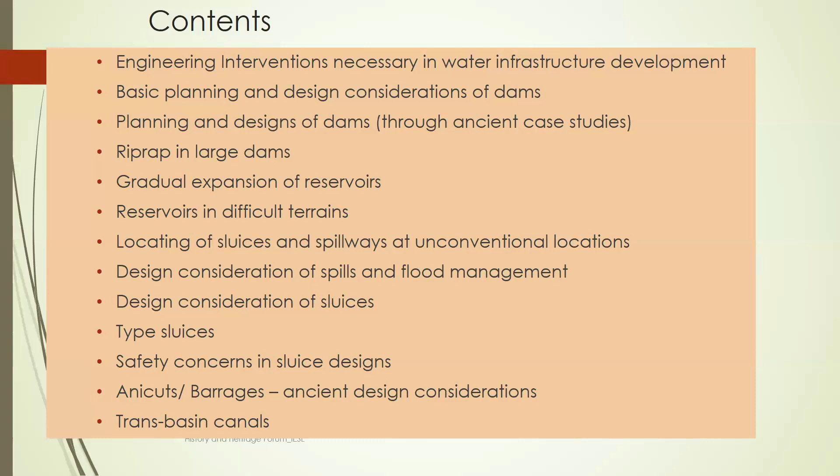So you can see minimum, at least a minimum of 10 years will be needed for commissioning of a new scheme at the ground, and it will go beyond that depending on the above facts I just noted. At the same time, it is not a one-man show as we often hear in folk tales, that this man built up this reservoir and things like that. Actually, the success of both ancient and modern projects depends on the experience and dedication of a multidisciplinary team, that we should keep in mind that it is teamwork actually.

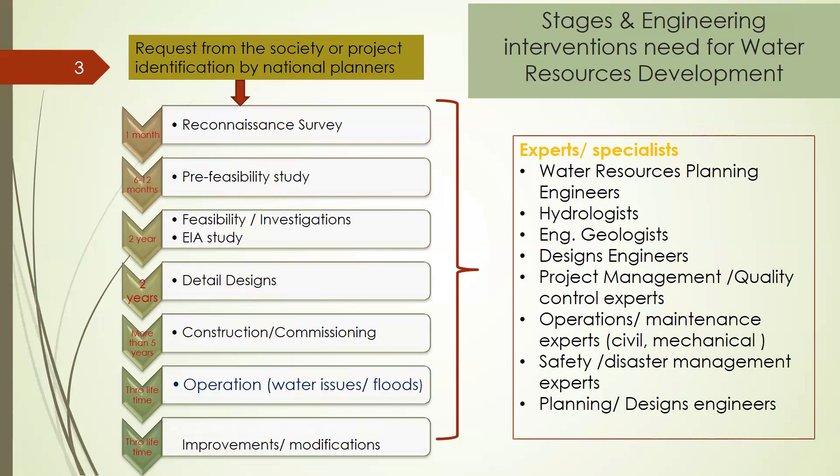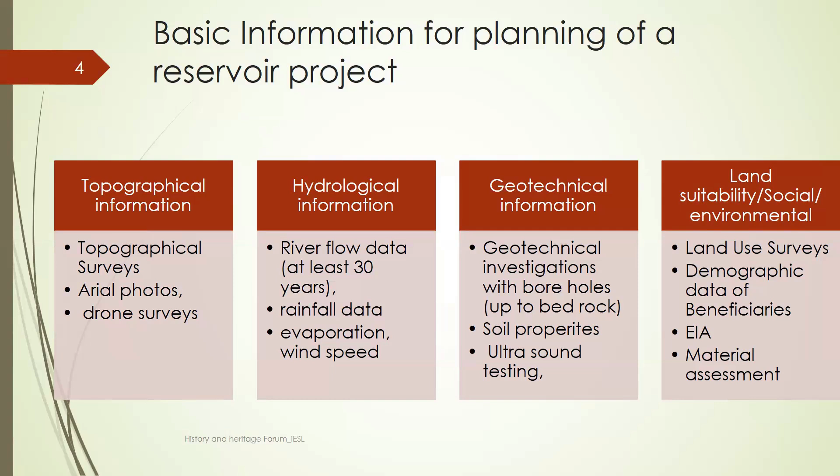Since I discuss more matters on reservoirs, I thought of introducing basic features of a reservoir project for the benefit of the audience here who are not familiar with the principal features of a reservoir project.

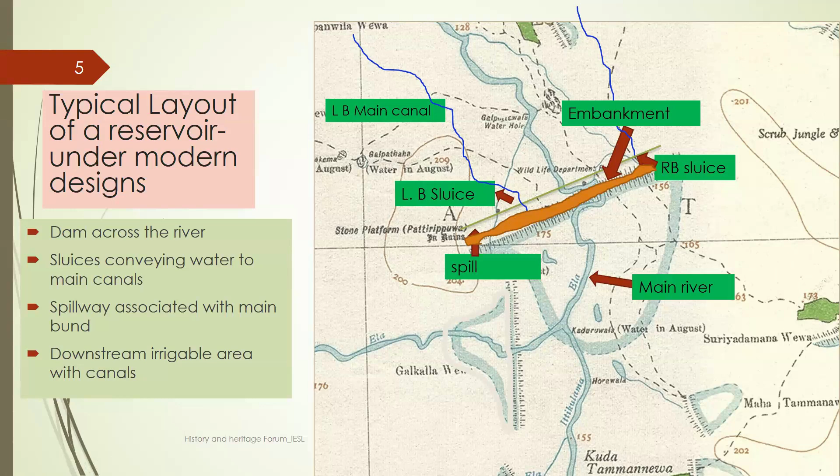While this seems a very simple arrangement, ancient engineers optimized these features based on site-specific needs, deviating wherever necessary depending on specific site conditions. I will go through some components of this list for you to get a general idea about planning and design principles in the foregone era and also in the contemporary era.

The basic consideration the design engineer will focus on for a dam: first and foremost, the dam should be stable - that is obvious. Then it should be able to control excessive seepage, with only an allowable limit through the dam, especially the earth dam.

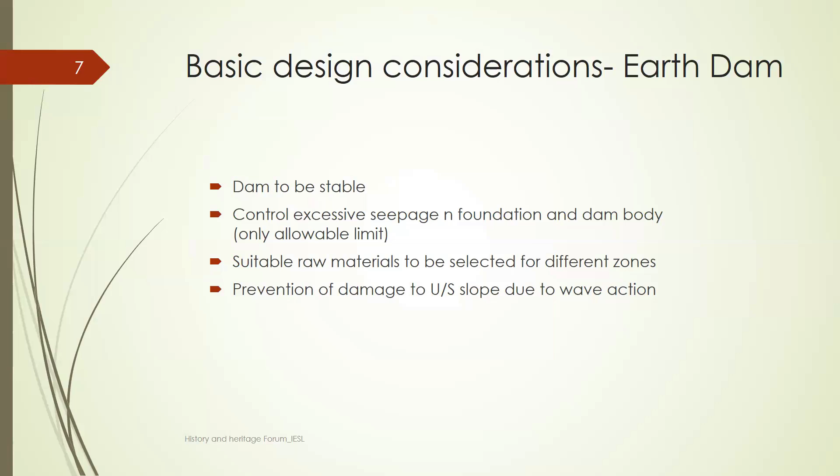For that, suitable materials are to be used and construction done with extra care, having very strict quality control. The most frequent damage to an earth dam occurs covering the slope, that needs to be prevented in the upstream due to wave action, where riprap is used. So those are the very basic things I must mention here.

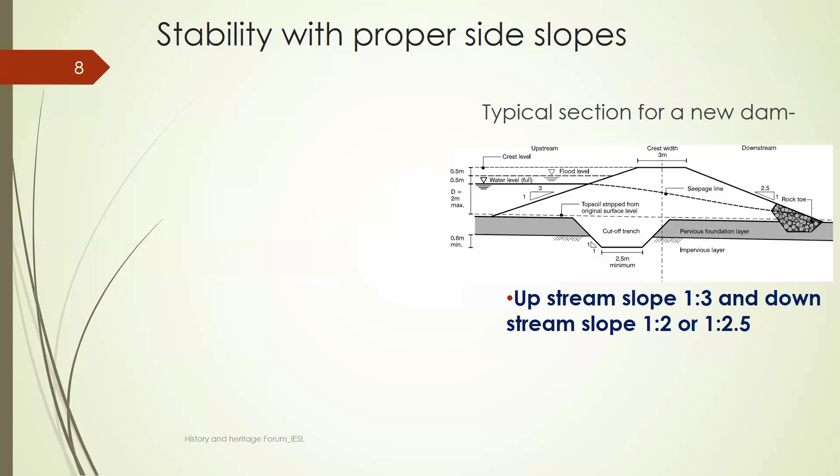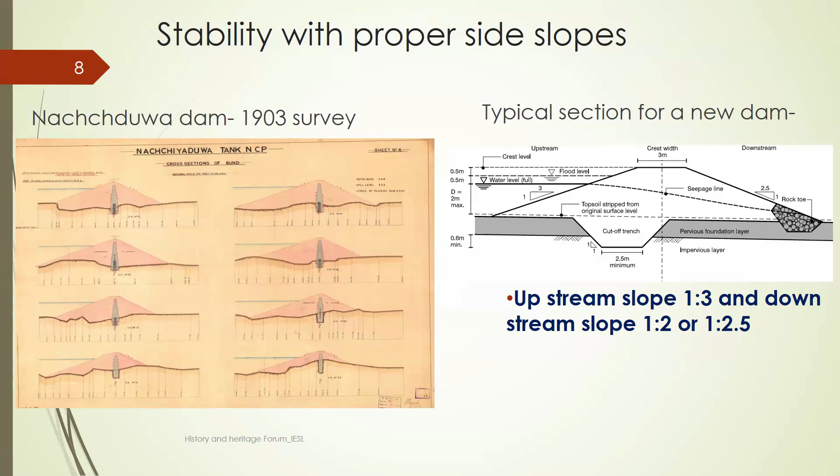But today, engineers optimize designs mainly considering the overall costs and also to save raw materials.

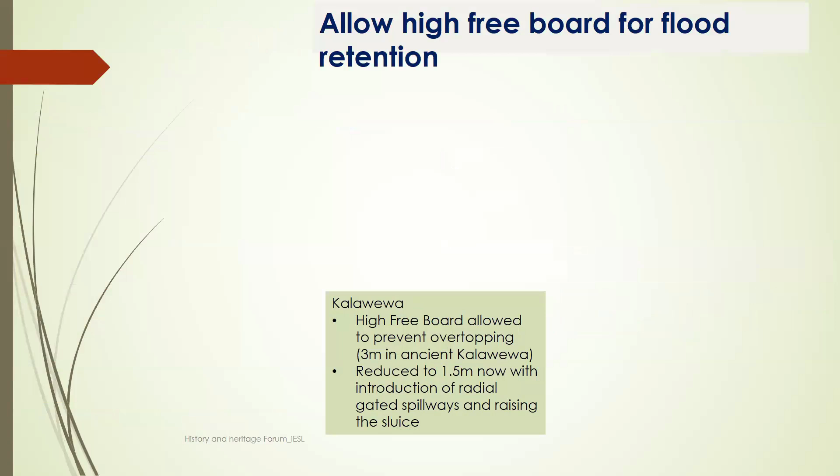One other safety factor in the ancient earth dam is the high freeboard - that means the height difference between the spill crest and the dam top. This space is allowed to retain flood water during storms, as mechanical gates were not available in the ancient era. Flood control was possible only through natural spills.

The sketch shows the Kalawewa bund based on surveys done on restoring during the 1870s, and the photograph also is the Kalava sluice that was not raised according to the new design.

This volume of water between the dam crest and the full supply level, spill level, what I have marked here, can be called inactive volume, because it is a flood detention volume, and it will go away when the flood recedes after the storms.

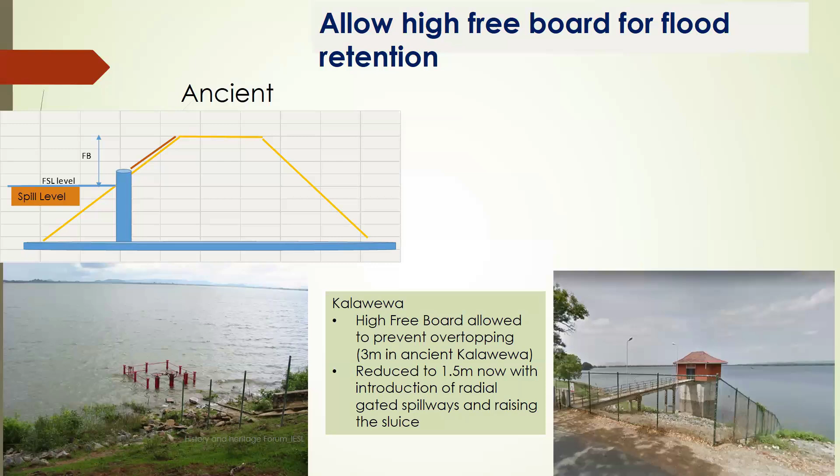So as the freeboard was - I will go into the current section as well here to show you the difference. Actually, in the ancient Kalawewa dam, the freeboard was 3 meters minimum, in some places more than that. Then with the new hydrological analysis, this could be reduced to 1.5.

Now with the introduction of radial gates, and also by extending the spillway length, we could reduce the freeboard, and also increase the active storage, and also increase the height of the sluice. So you can see this new sluice in Kalawewa is at the same level of the bund crest level, and you can see the volume of active storage that can be used for various benefits could be increased that way.

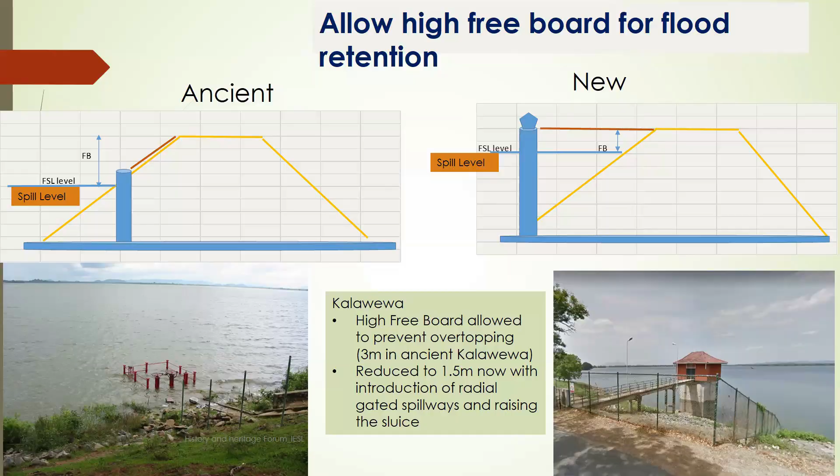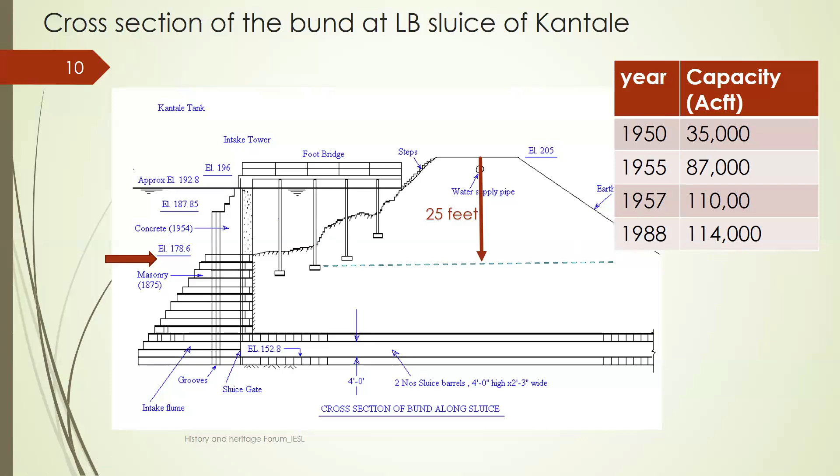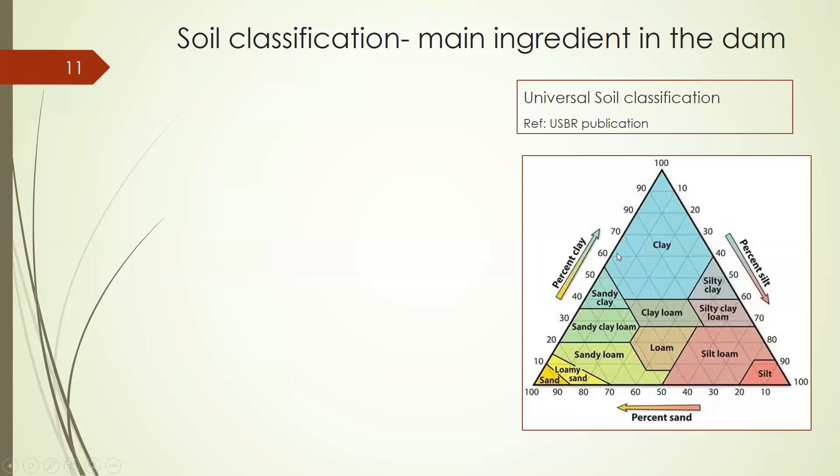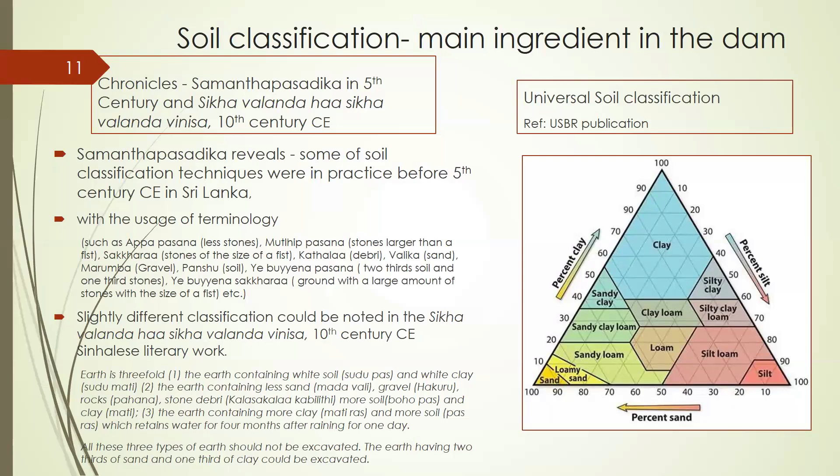Riprap is an important feature needed in an earth dam, as I mentioned earlier. It's needed for long-term sustainability when we go to restore many large dams. Modern engineers found that riprap remained intact even after centuries of abandonment of the dam. In modern design theories, riprap design follows serious calculations to determine the size of the boulders and the thickness of the riprap layer.

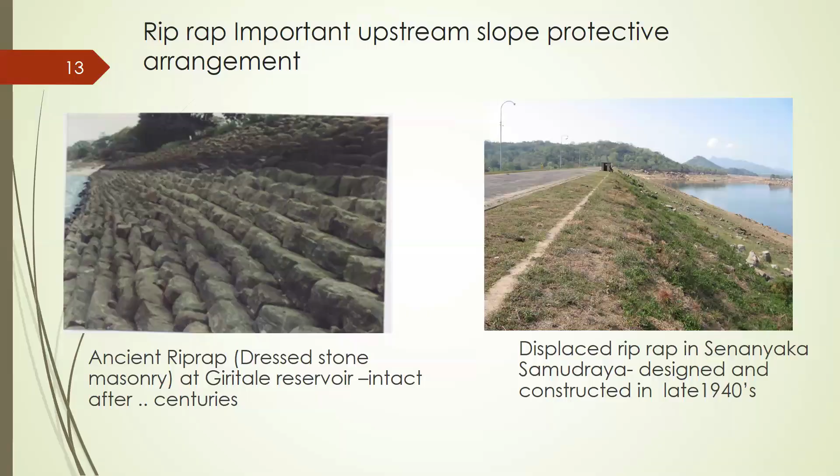I thought of sharing the design details of another marvelous riprap design found in Kudawilachchiya, which is still in an abandoned state, and the irrigation department plans to restore it when funds are received. The special feature in this design is placing the riprap at 2 levels. In this cross section, you can see there were two ripraps at 2 levels, with a berm in between these layers on the exposed earth dam. There's no scientific explanation yet for this design.

How it survived without displacing despite exposure to several centuries of storms - it's in the middle of Wilpattu National Park, a crossing path for elephants. With all these disturbances, it's still there without any damage. You can see the sizes of the boulders - I'd call them nicely cut stones rather than boulders, shown in this figure on the right-hand bottom side. No binding materials were used, but with their self-weight and balancing each other, anchoring to the slope, the whole system remains stable.

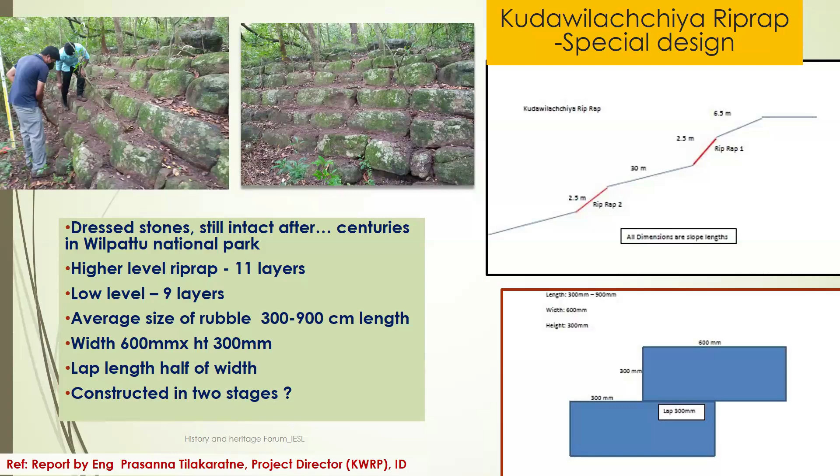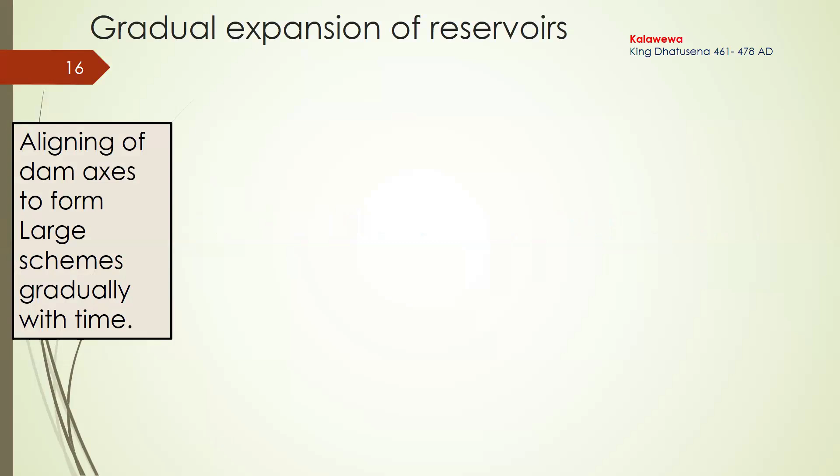Another aspect I want to bring to your attention is gradual development. The ancient engineers actually constructed reservoirs by gradual expansion - an approach modern planners should consider for long-term adaptability. This is a very nice theory we can follow. It's like building a house to suit your budget first, and then taking extensions as your family requirements expand.

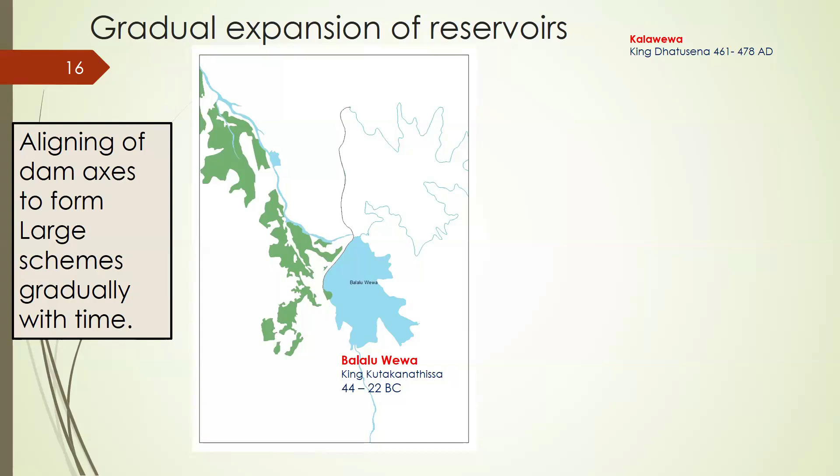Likewise, the ancient Kalawewa was not created as a single large reservoir, but as a combination of two large reservoirs. The Balalu Wewa was constructed in the 1st century BC, and the adjoining Kalawewa was constructed across Kala Oya in the 5th century AD. By combining these two, King Dhatusena created the Kala-Balalu Wewa. The most amazing intervention here is aligning the axes of the two dams to create a single dam at a later stage.

That is the most amazing point I want to bring up here. What if the alignment did not tally when the efforts of combining the two dams were tried? I leave that question for you to think over and find the answer.

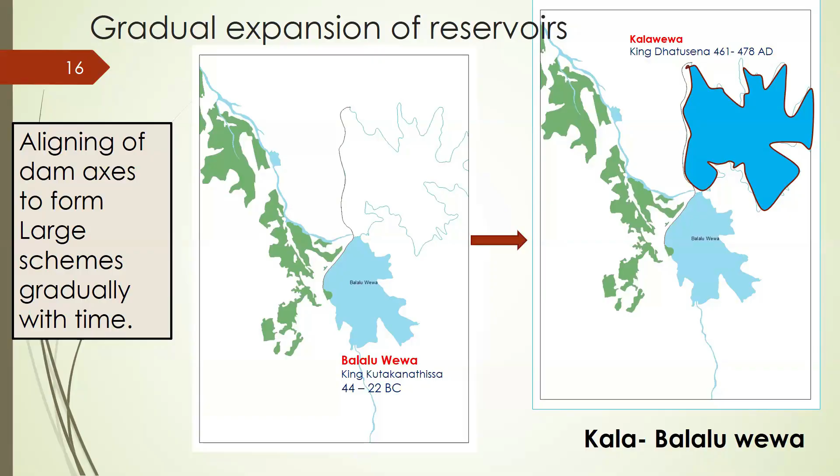Another impressive example is Parakrama Samudra. 7 reservoirs are believed to be connected to form this Samudraya. Topa Wewa was built during the 4th century AD, while Parakrama Wewa was built in the 12th century. When topographic surveys were done in the early 1900s, surveyors found a feeder canal starting from Amban Ganga extending in the northern direction for a long stretch, feeding each of these individual reservoirs. At that time, they had not identified these reservoirs - only the Topa Wewa was known to exist, and they thought the feeder canal only went up to the Topa Wewa.

While restoring in the 1950s, only 3 reservoirs were restored: Dumbutulu Wewa, Parakrama Samudra, and Topa Wewa, and later Kalahagala was restored. Still, Bu Wewa is not restored now—it is not possible to restore at the moment.

So likewise, this is a combination of a few reservoirs here. To support this phenomenon, let me go back to this slide again. The beauty of this complex is that each of these reservoirs can operate independently, as separate sluices are there. This is a very successful strategy for current design engineers to follow to optimize the water resources in the system.

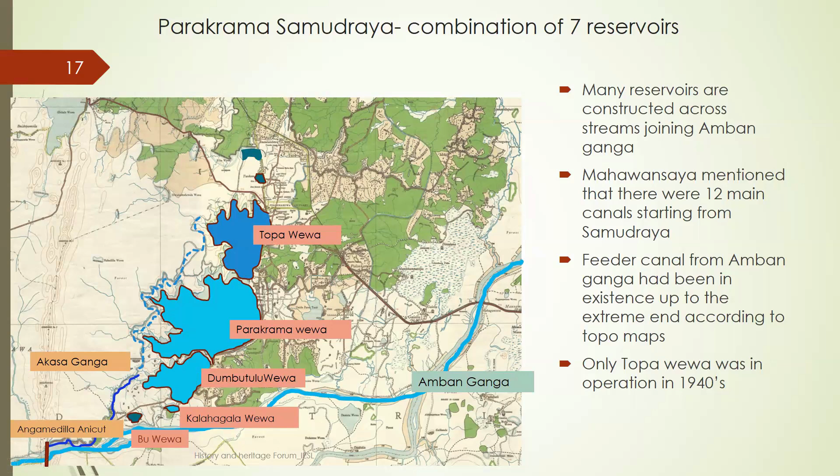Actually, in the Mahavansha, it is mentioned that there were about 12 sluices with canals starting from Parakrama Samudra. So that may be the reason why each large reservoir would have had 3 or 4 sluices. Likewise, that may be the way many canals and sluices are mentioned there.

Then another typical example I want to quote here is Mee Oya. In Mee Oya, you can see 5 reservoirs are located in a similar manner, but only 3 reservoirs are interconnected. Those are not connected like Parakrama Samudra, but operate separately: Attaragollawa, Palukadawala, and Ambakola Wewa. They are interconnected anyway with a feeder canal.

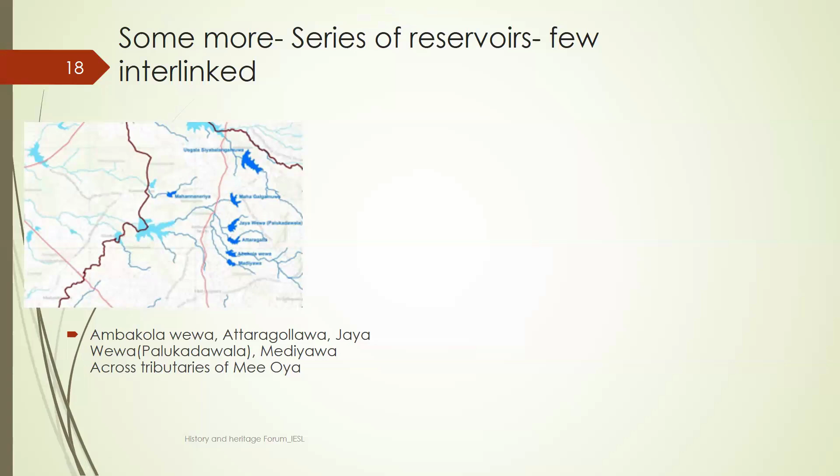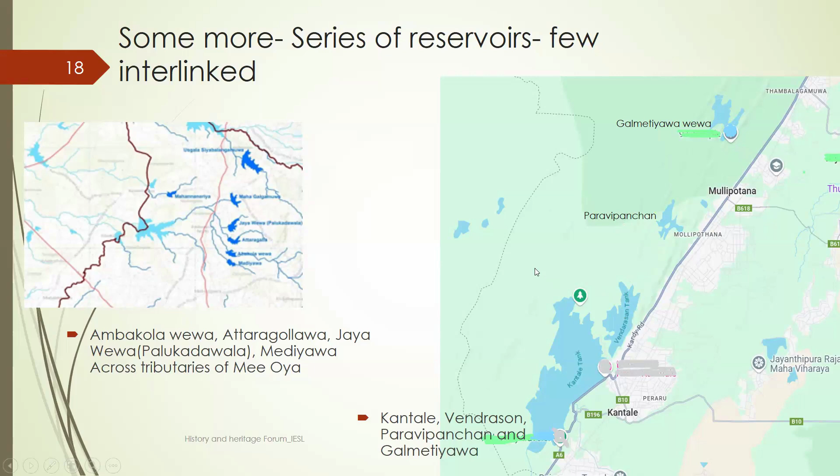Similarly in Kantale, when you see the topo map here, you can see 5 reservoirs are located in a very similar manner. Kantale and Vendrason reservoirs are interconnected now, and Paravipanchan and Galmetiyawa are operated separately. But there is a belief that the Vendrason tank and Paravipanchan reservoirs were interconnected in the ancient era.

Then let us see how the ancient engineers handled difficult terrains—that is another important area. When selecting a location for a dam, I explained the advanced technologies used by modern engineers for hydrological analysis, geological investigations, and also surveys when fixing the dam axis across the river.

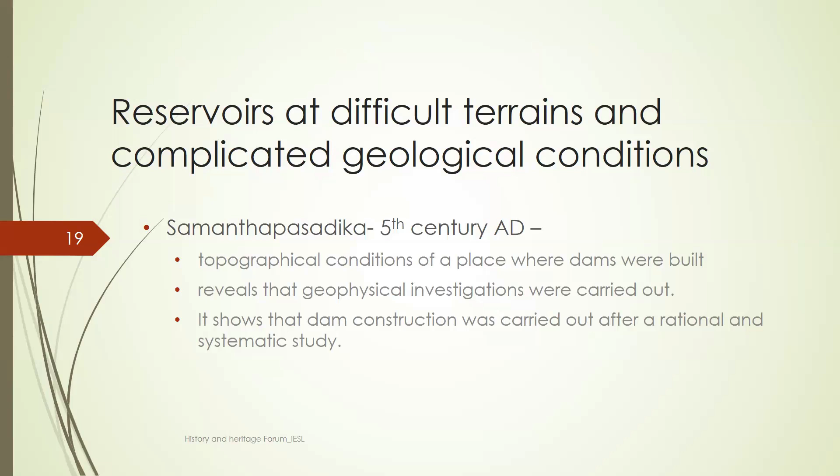The main river crosses through a very narrow valley where the main dam is located. It is a very small dam. When someone goes to the site, you can see it is even a very small dam built across the river.

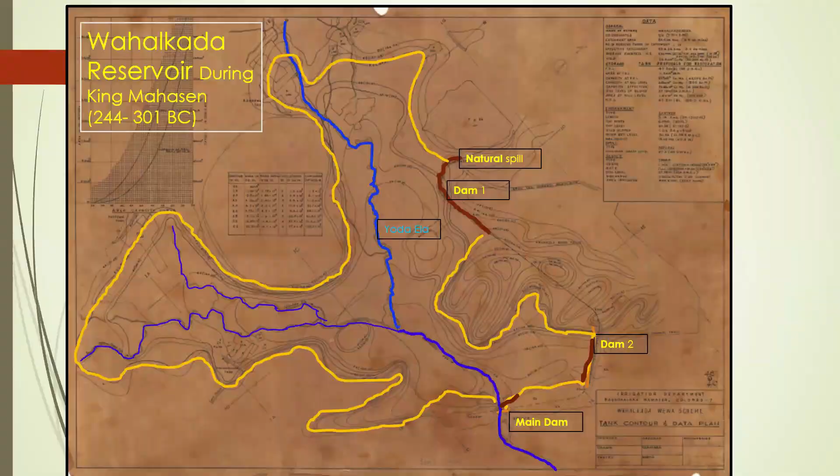Sorabora—I must mention here—is one of the reservoirs that has not been breached even during the dark era of our history. It was so solid. I can quote many more examples anyway, but I've selected this one.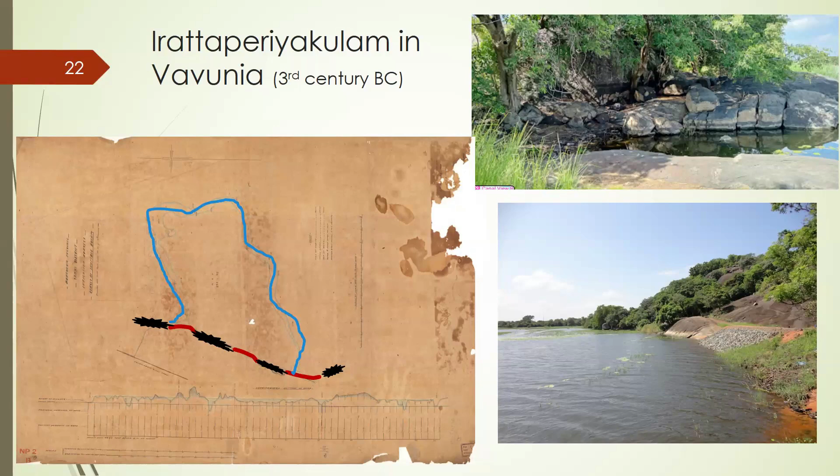I'm sure you would have got some idea of the selection of difficult terrains without any hesitation, how they have gone into that level.

Another example I want to highlight about difficult terrains is Giant's Tank. It is located in a very peculiar location in Mannar, once called the rice bowl of the country. Current engineers are puzzled over many aspects of this one because it is located in a small sub-basin, not a river basin. It is adjoining the Malwatu river basin, where the catchment in this section is very limited, so the inflow to the river is very limited. There is no river crossing the dam except some drainage paths. Also, the geology of the area is not much suitable for a storage reservoir—seepage is possible, and foundation is not very conducive.

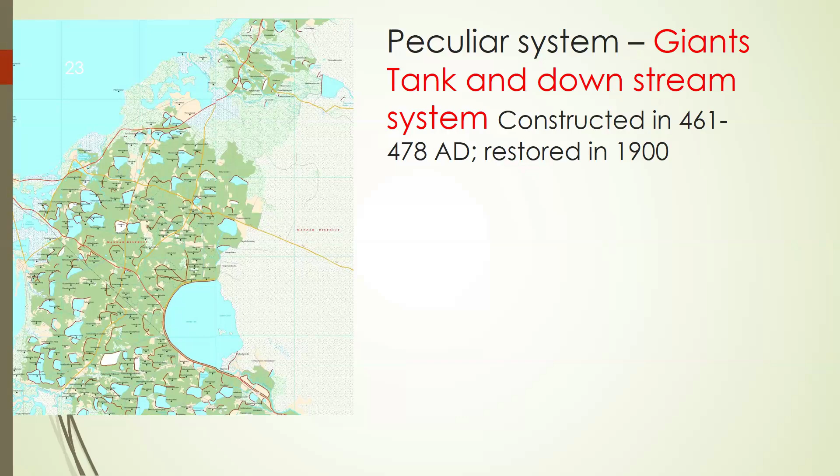Despite all these negatives, a shallow reservoir has been formed with a U-shaped embankment. The total irrigable area is 4,350 hectares, and about 162 small reservoirs downstream get filled up during the Maha season to feed the irrigable area under them. But during water shortage, that is in Yala, small reservoir beds convert to irrigable area and get water from the main canals. I cannot find reference to a similar design anywhere in the world, and this would have been designed by a group of genius people in our country.

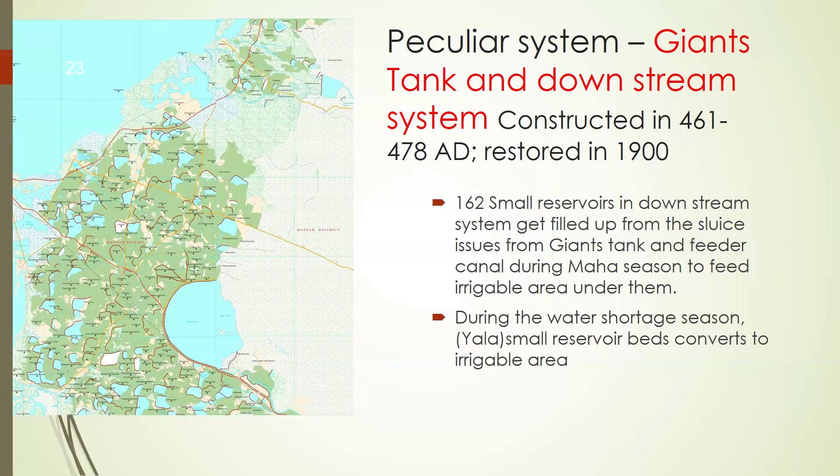Another unusual design of dams in ancient Sri Lanka is locating the dam not across the river. I mentioned at the beginning that a dam is usually built across the river, but in many rivers, ancient reservoirs in Sri Lanka are not built across the river. Maybe due to certain reasons—I will briefly explain.

It is built parallel to the river. Out of many examples, I like to quote Rugam in Batticaloa. The strategy was to divert water to the reservoir from the main river. This is the main river going, and there is an anicut. This is the dam constructed parallel to the river, and then there is an anicut upstream. Water will be diverted to the reservoir whenever necessary, and then there is a sluice at the left bank that will release water again to the river, controlled through the sluice, and released to the river to be picked up from the anicut downstream.

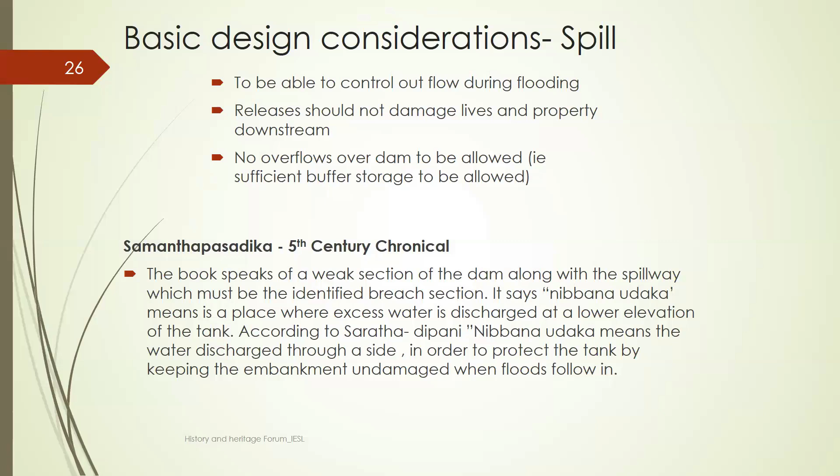The characteristic of the spill should be that it can control outflow during flooding, and releases should not damage lives and property downstream, and no overflows should be allowed that could create damage to the dam. Again, in Samanthapasadika, it has mentioned the spill as a mechanism to control outflow, with a permanent spill or section suitable to breach during floods. The same principles—the breaching section and selection of the spill—are there in our current guidelines used by engineers.

According to current dam safety theories, earth embankments, actually earth dams, are vulnerable to many types of failures. You can see the type of failure—I have given figures for a few failures here. According to global statistics, the most common failure mechanism is hydraulic failure, which happens during stormy weather conditions by overtopping the dam, as shown in this diagram.

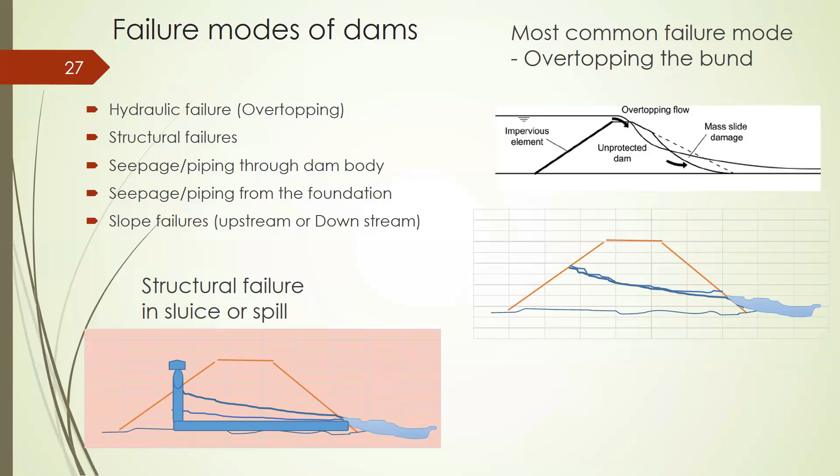If the dam foundation or the dam itself is comprised of bad quality soil, this type of failure—piping or seepage failure—can occur. This is the structural failure that can happen if the sluice tower or sluice barrel has developed problems, or if there are leakages through these components. Those are the basic facts you have to keep in mind regarding the stability and sustainability of the dam.

When studying the history of failures of Sri Lankan dams, it is noted that the majority of dams had failed due to overtopping, that is hydraulic failure, as I explained in my previous slide. This layout plan of the breached Huruluwewa, a drawing prepared during restoration in the 1950s, shows the dam has been breached at the river crossing.

You can see the dam breach. The longitudinal section of the Huruluwewa dam shows that the breach occurred at the river crossing section, though it is not a sluice failure or a structural failure.

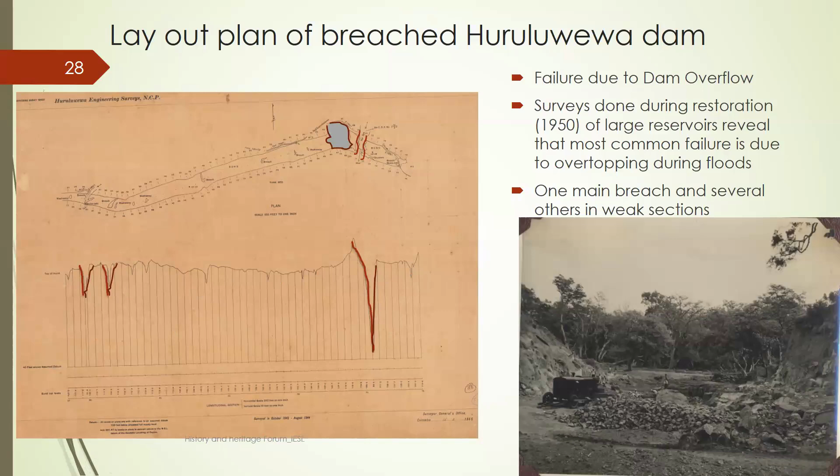As I mentioned, most of the ancient dams failed due to hydraulic failures. The sites selected for spillways were perfect, I must say, when you carefully study the details of ancient spillways. The ancient geotechnical engineers did their part perfectly. Nachchduawa is one example where the most suitable location had been selected for the spill.

One of the main concerns of the planning engineer of the current era is finding a suitable place for a spill, which can safely pass the flood volume without damaging the dam or the downstream system. That is a very important decision the planning and design engineer should take.

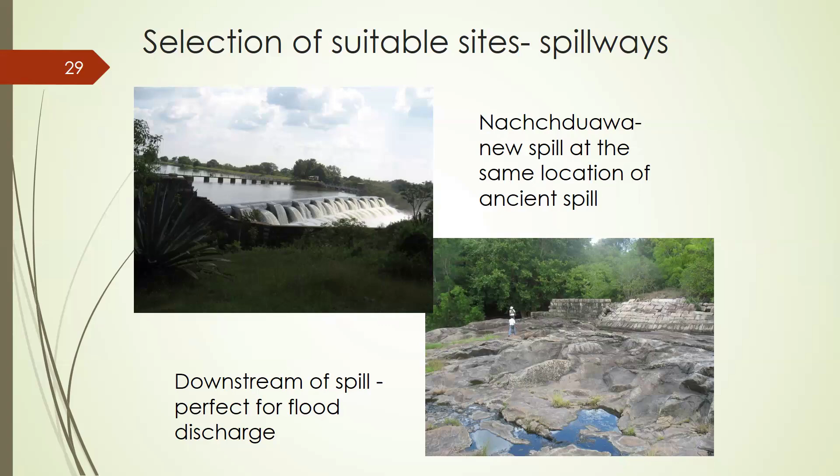When talking about control of flood discharge, we find a more peculiar system adopted by ancient engineers: the Debarwewa, Tissawewa and Yodawewa system in Tissamaharama. This is a very rare example of a multi-stage flood retention system. Flood flow from Debarwewa is directed to Tissawewa, and then from Tissawewa it flows to Yodawewa. From Yodawewa only, the flood water is directed to the river to flow into the sea.

Operating such a system requires precise coordination. Previously it would have been a very difficult operation, so this is a very risky design, I must say. When restoring the system in the early 1900s, the same flood management system was followed. I'm sure the engineers here who operate the current system know how much effort is needed to balance the three reservoirs during floods to safeguard the infrastructure and properties downstream.

I must note that in any newly designed reservoirs, this type of complicated arrangement is not adopted by current planners. I'm sure we will ensure that separate spillways are provided to each and every reservoir.

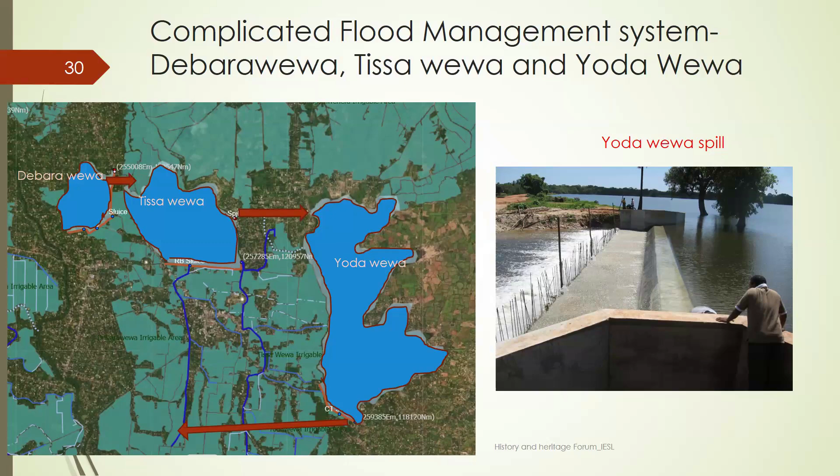As mentioned earlier, most of our ancient dams have been subjected to hydraulic failures due to insufficient spill capacity. Kalawewa is a very good example. While doing the hydrological analysis using current scientific approaches, engineers found that the spill length had to be increased at double fold, in addition to extending the spill length. So the current Kalawewa spill is more than double, maybe double fold, the previous ancient spill, and also incorporates two radial gates. I'm sure most of you had noticed that.

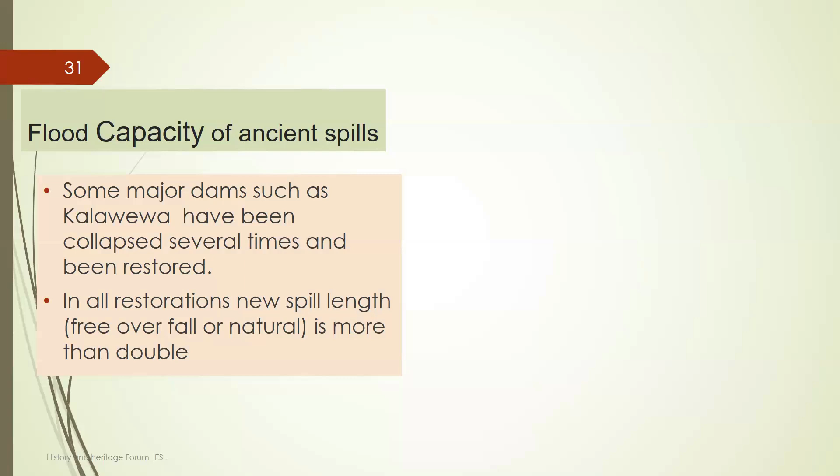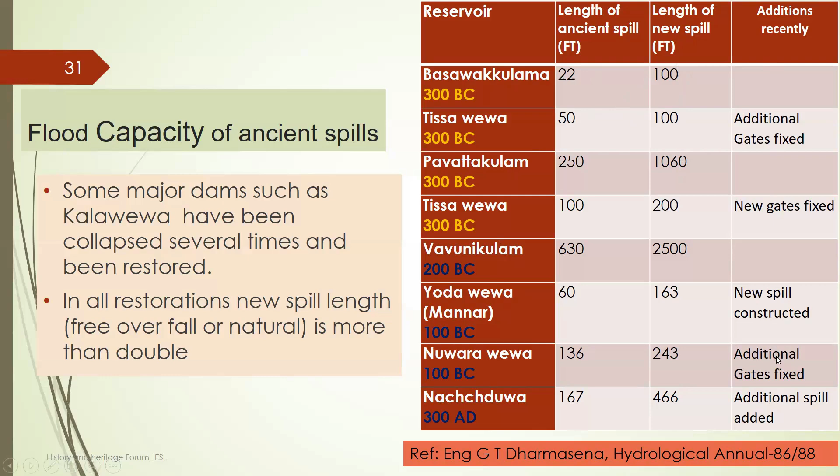This table shows the original spill lengths and new spill lengths provided after calculating the flood flow under modern hydrological theories. During the restoration, these were adapted, and this information comes from hydrological analysis done by engineer G.T. Dharmasena. So you can see a comparative analysis of the length of the ancient spillway, the new spillway length, and the additions made to the spillway later.

Another aspect I want to bring to your notice is in-basin diversions. That is a very effective and genius design method adopted by our ancestors in water management. Ancient engineers mastered in-basin diversions to ensure water availability year-round. Such techniques offer valuable insights into climate resilient water management, which we talk about very frequently today. I can quote many examples all over the country for in-basin diversions, but I'll take only a few examples to explain the theory behind it.

This is Tabbowa Reservoir, located across Nanneriya Oya, a tributary of Mi Oya. To serve the acreage in the Tabbowa area, inflow in this stream from the Nanneriya area was not sufficient. So what ancient engineers did was divert water from the main Mi Oya by constructing an anicut across the Mi Oya, and then divert the water to the Nanneriya area. Since it is a single basin, we call it an in-basin diversion. Tabbowa is a very successful and effective system, not only during water shortage periods, but also during floods.

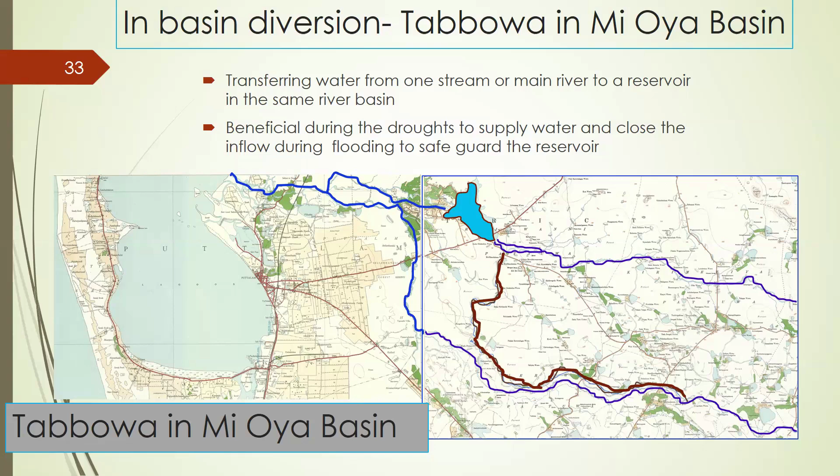The second example I want to quote is Parakrama Samudra, because in-basin diversion happens here again. The Angamedilla Anicut diverts water through a yoda ela called Akasa Ganga from Amban Ganga. The advantage of in-basin diversion here again is the option available to shut down the yoda ela water diversion during flooding. So when we don't want water to flow into the Parakrama Samudra during flood time, we can close the Angamedilla Anicut and allow the water to flow in the Amban Ganga without adding to the Parakrama Samudra.

The inflow into the Parakrama Samudra from its own catchment is controlled by 10 radial gates. I'm sure most of you have seen this in the media shown a month or two back. Even after closing the Angamedilla Anicut, sometimes we may have to operate the 10 radial gates, meaning the inflow from the own catchment is very high. But during the drought period, water in-basin diversion is necessary to feed the Parakrama Samudra irrigable area.

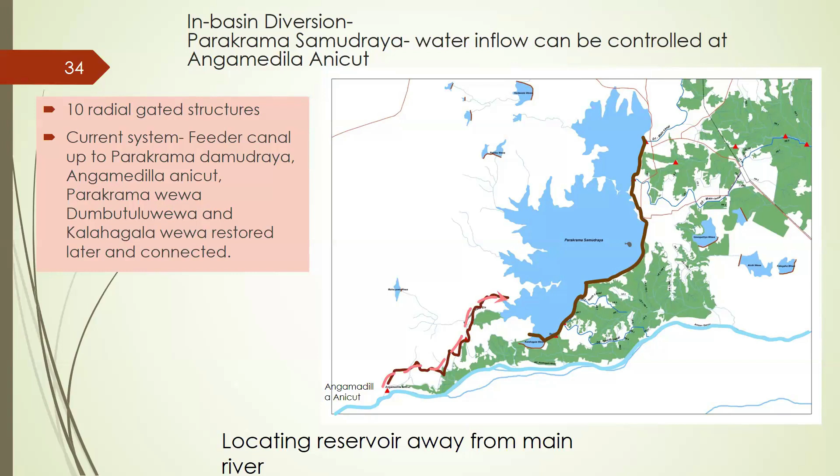I have shown here the water flow from the Angamedilla Anicut. Another point I want to highlight here is another solution for inadequate spillways.

To address the inadequacies of spillways, ancient engineers found another method for detention of water coming from its own catchment. This methodology was used to control the inflow to the reservoir and retard it. You can see, I hope clearly despite the quality, that all these small streams coming into the reservoir were blocked by small reservoirs called flood detention reservoirs. These would control, to some extent, the flood period and help overcome overtopping of the dam. This is actually still used in current design principles, since we cannot design spillways to the level a design engineer would expect.

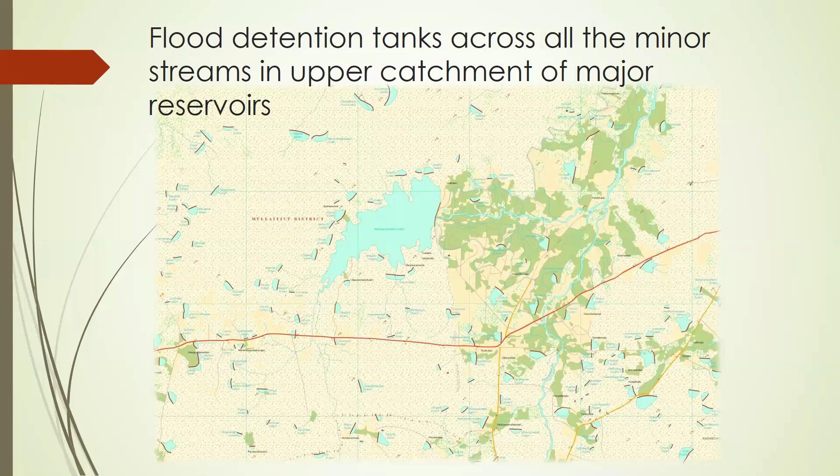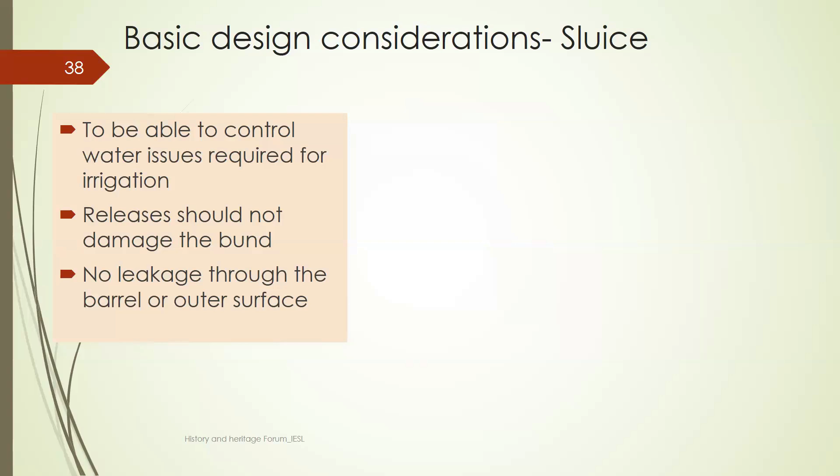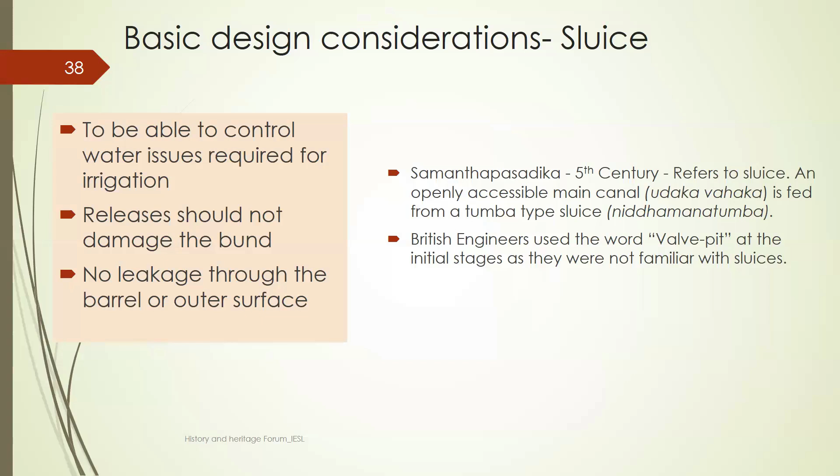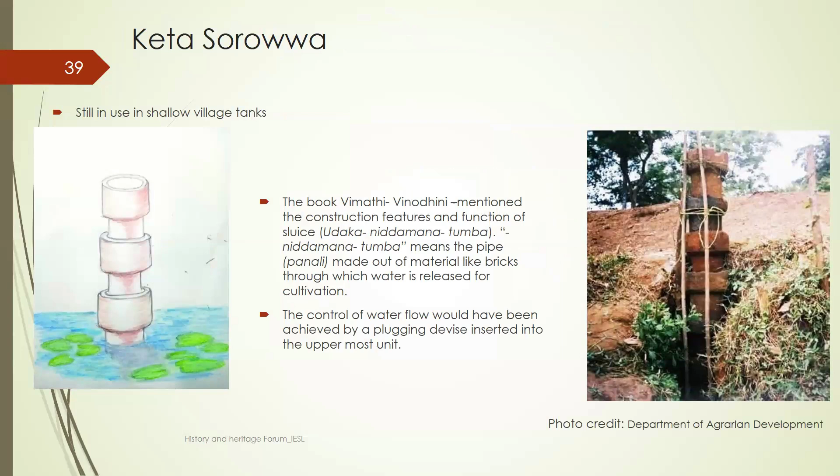British engineers used the word 'valve pit' because they were not much aware of the terminology 'sluice'; only later did they become conversant with it. This type of Keta Sorowwa, still in use in shallow village tanks, is considered the most primitive type, used by our ancestors. The vertically stacked cylindrical clay pots, or clay pipes, were used to control water flow through the sluice.

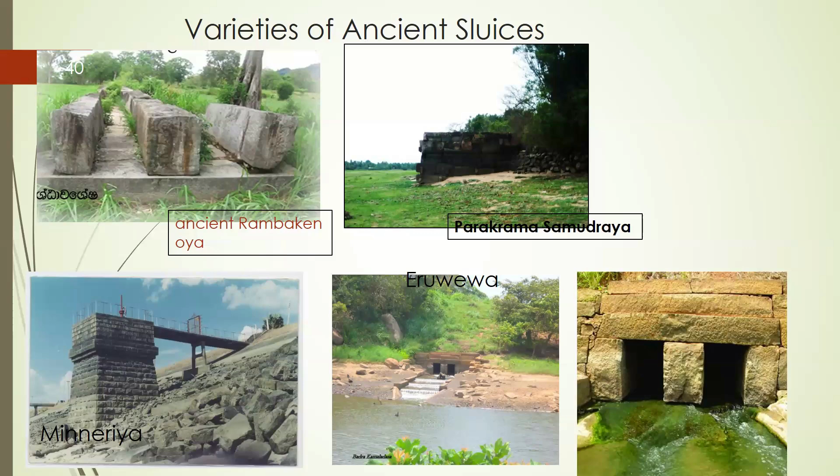Fortunately, we still have physical evidence of more advanced ancient sluices, especially in large reservoirs, as shown in this slide. The Kalawewa sluice, built centuries ago, followed hydraulic principles that modern engineers still validate today. That is a true testament to ancient engineering wisdom.

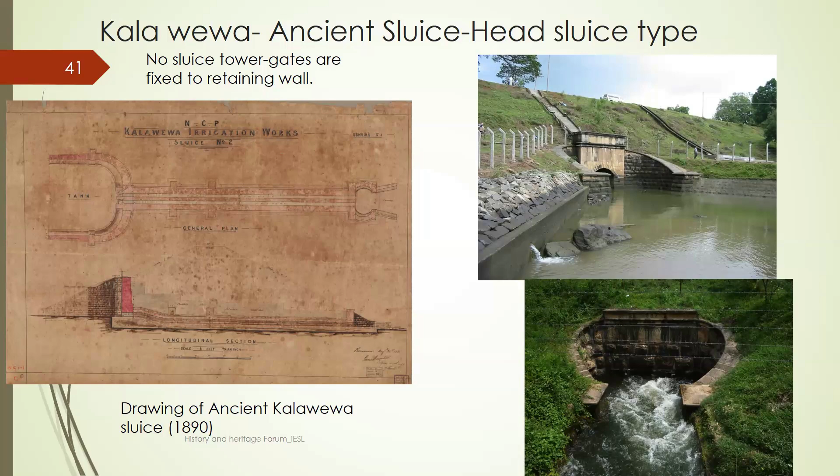This plan of the ancient Kalawewa sluice was drawn in the 1890s, and the sluice is head wall type, meaning there is no sluice tower here. This is another simple type of sluice used in many large reservoirs such as Nuwara and others, especially in the Anuradhapura Rajarata area. When restoring it, the sluice barrel was intact and there was no need to replace it, which indicates the complex hydraulic theories we now use for designing sluice barrels and towers would have been used by our ancestors as well.

I cannot miss the famous Maduru sluice in this presentation, as it gives many more clues on advanced design principles. To complete my presentation, during that bygone era, meticulous surveys ensured sluice plates were set at precise elevation and precise location, as we have heard many times, to enable gravity-fed irrigation, a method still fundamental in modern water management.

The sluice barrel, as you can see here, is not a straight one. Its direction was changed to suit the site conditions. This is extremely complicated hydraulic design, I must say. The arch-type dome shown in the photograph above, used over the sluice barrel, is supposed to serve as a mechanism to diffuse pressure in the sluice barrel.

I must mention Professor R.A.L.H. Gunawardena, who conducted many investigations in the 1980s when this was discovered and has written many papers on it. He noted that specially kiln-fired bricks were used, similar to modern high quality wire-cut bricks. I must say I have never seen such a design in any textbooks we have used, and this has not been replicated anywhere else.

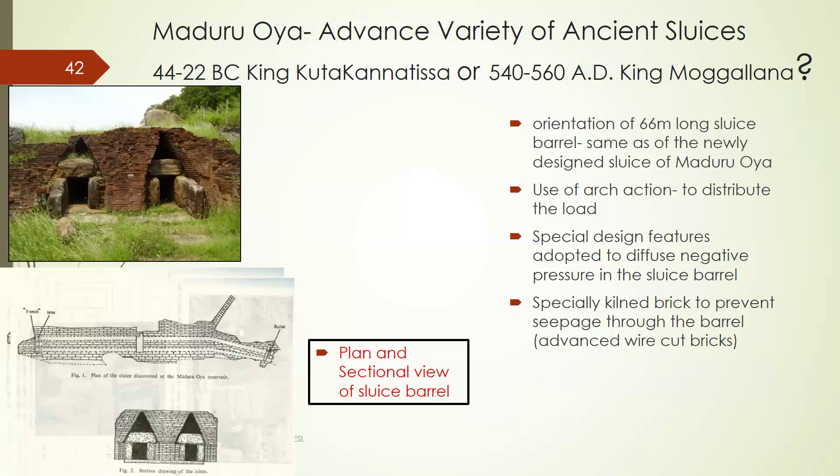Another famous unique sluice can be found in Soroborawewa, which is quoted even in our school textbooks. We'll look at this creation from the point of view of a design engineer. The question that comes to mind is what type of creative ideas went into the design of this sluice, which perfectly matches the ground condition.

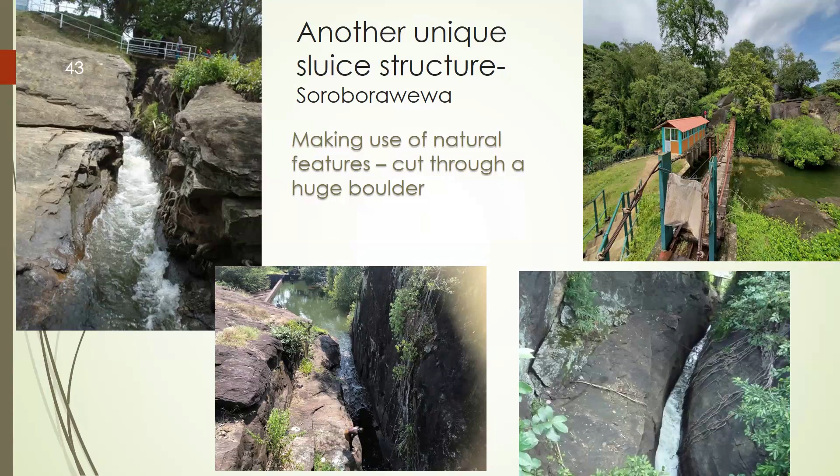If a conventional designer had handled the planning of the Soroborawewa at that time, it would sometimes have meant removing rock at the site and constructing a typical sluice structure, as we showed earlier. But fortunately, it was in the hands of a creative group who made wonders through their perceptions.

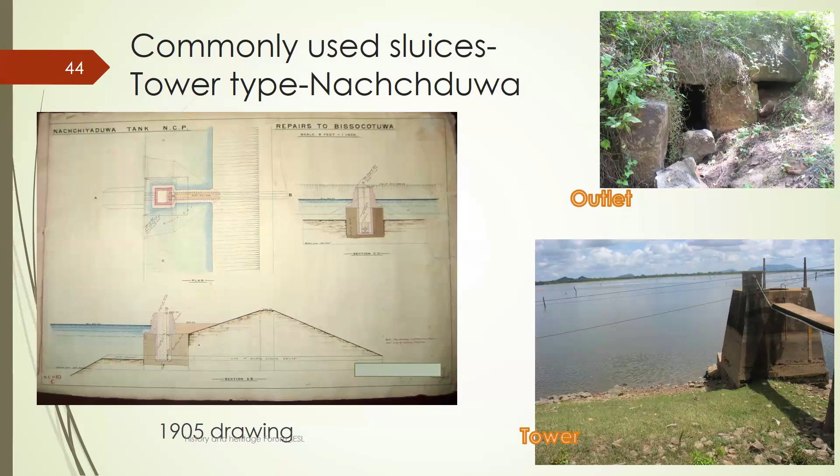This is a tower type sluice that had been there in Nachchaduwa, as you can see in the photo. This is again a common type in many ancient reservoirs. I wonder whether there were some type plans or guidelines for designers at that time to follow, similar to the structures we have today in our institutions.

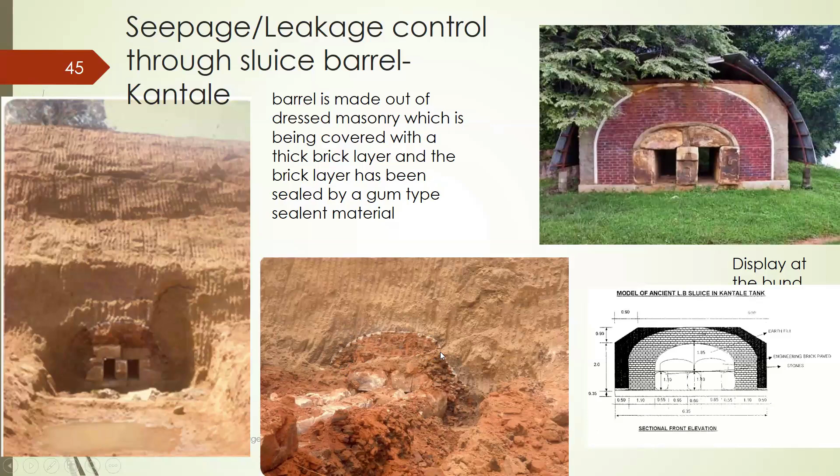Most of the ancient sluice barrels were in perfect condition even after many decades, many centuries of abandonment. We can observe that some thin cement mortar has been used to bind these boulders together in some of the ancient barrels, which we can inspect now.

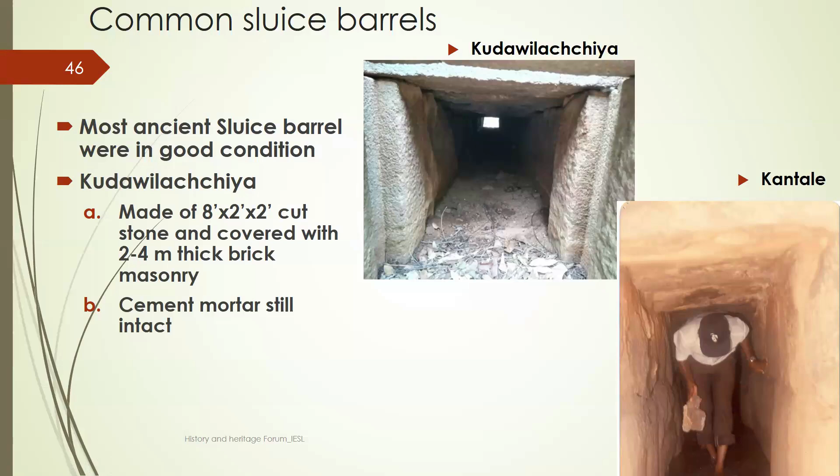That means they did an extensive survey downstream. It was not only the dam site - they would have surveyed the whole area and selected the suitable sluice sill level that would make it possible to drain out the water, meaning to convey the water to the irrigable area where it was necessary.

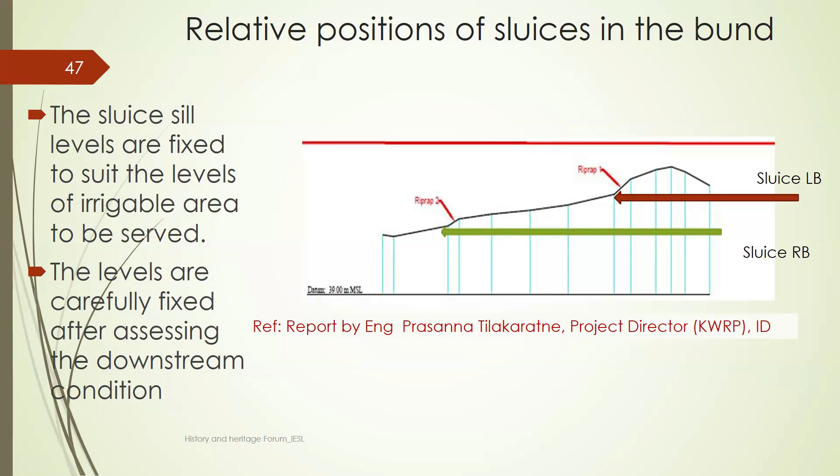This level of strategic foresight and adaptability - I must comment on these things as an irrigation engineer who has been involved in a lot of planning work - and I cannot imagine how this type of design strategy came into their minds at that age.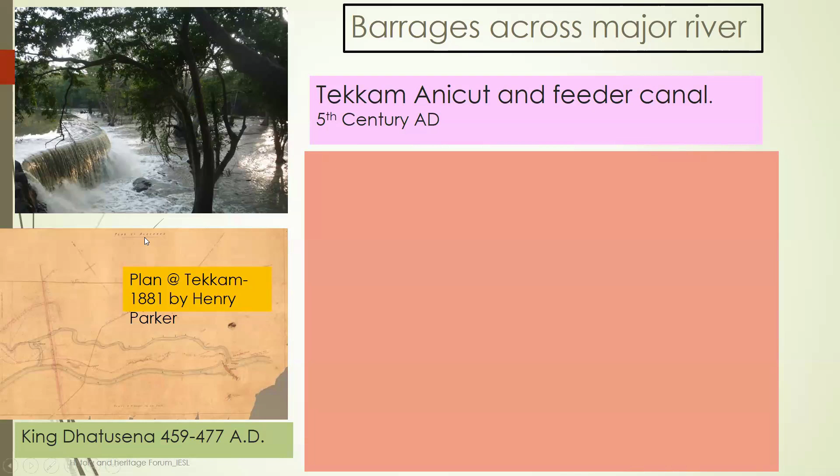You can see the large stone blocks interlocked - sorry, it is not clearly shown here - but the stone blocks are interlocked, and gaps were filled with an indigenous mortar made out of sand, lime, and bee honey, and also some wood resins, as noticed by researchers in studies that have been done.

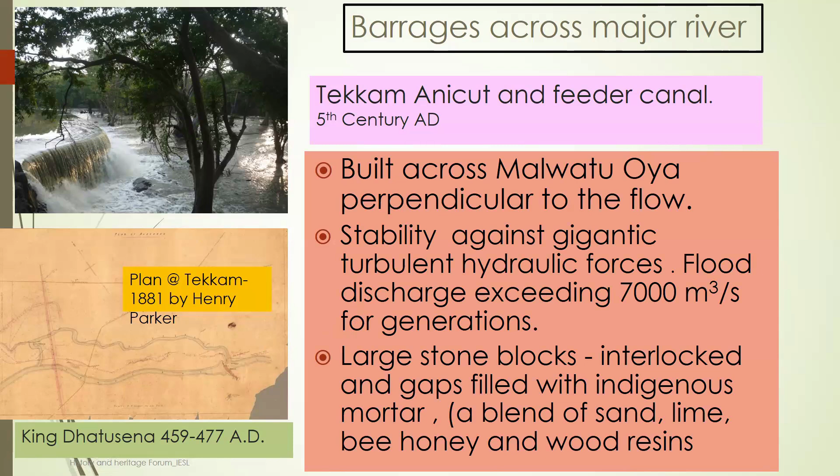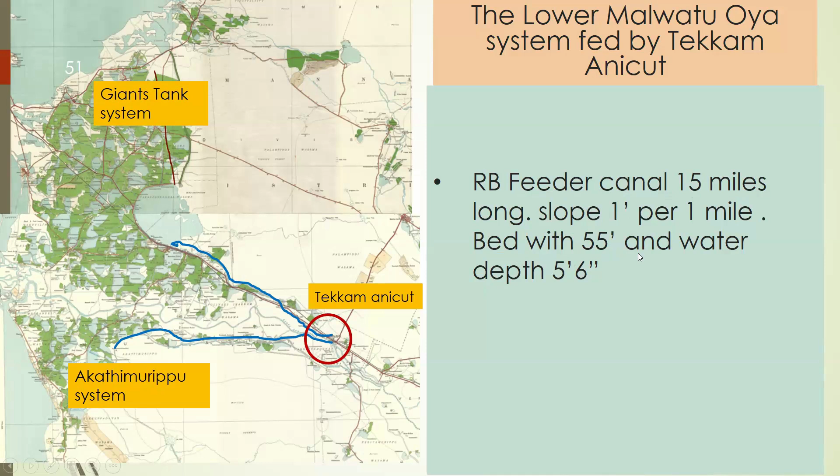Earlier we spoke about Giant's Tank, but I want to bring it up again here as a peculiar system, because Giant's Tank was located in a small basin, not in Malwatu Oya. You can see the barrage, Tekkam Anicut, shown previously, which diverts water to Giant's Tank. The feeder canal that takes the water is about 15 miles long, with a slope of 1 foot per mile, a bed width of 55 feet at broader sections, and a depth of about 5 feet 6 inches. The LB feeder canal also takes water from Tekkam Anicut to the Akathimurippu irrigation system.

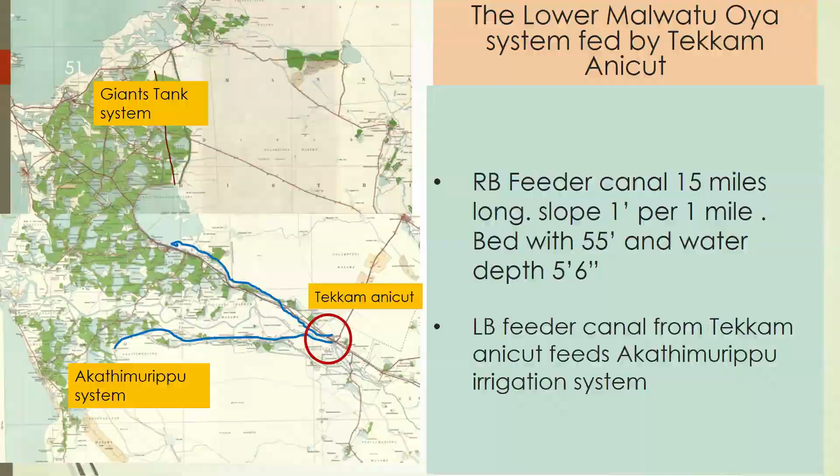That is again a very good example of a feeder canal and an Anicut combined very wisely into the irrigation system. The next example I want to highlight is the Elahera Anicut across Amban Ganga.

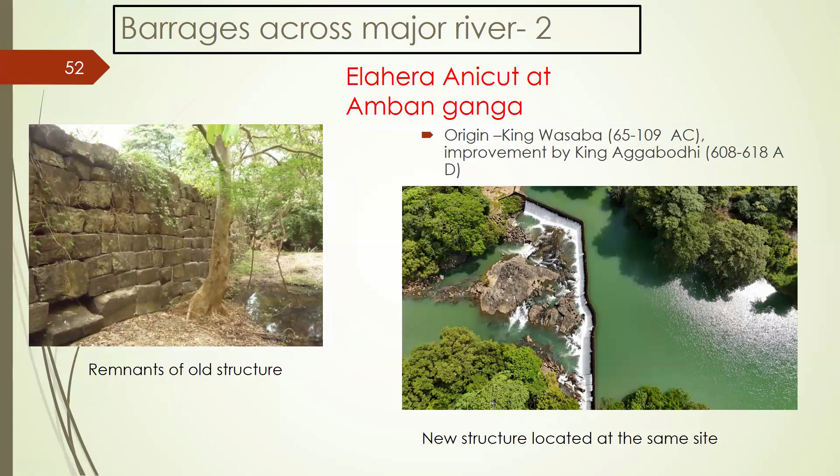I extracted this information from the Elahera layout map prepared in 1887 by British engineers, and also used Google Maps to compare and elaborate the layout.

You can see the Ambanganga branches into two: this is the main Ambanganga, and this is Kudaganga, as it is called. This is Moragahakanda, constructed upstream, and the main river path in this map shows Ambanganga and Kuda Ganga, and this is the high ground we cross when moving from Kudaganga into the main Ambanganga Anicut.

By selecting this location to divert water to the Yoda Ela—the Elahera Minneriya Yoda Ela—what they did was first construct an Anicut across Ambanganga to head up water, and then another Anicut in Kudaganga to head up water there too, so it could easily be diverted into Kudaganga. This is another genius design strategy, making use of the water availability in Ambanganga.

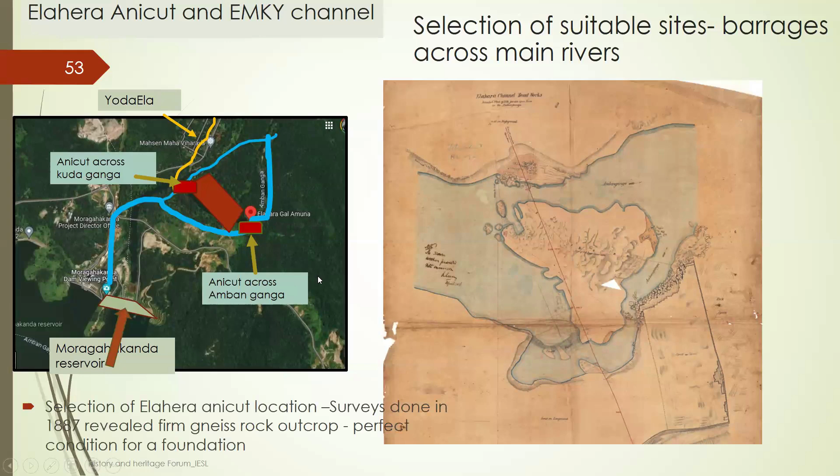The next item I'll go through quickly, as I only have a few slides left, is the transbasin canal. The transbasin canal itself is another topic involving a lot of conceptual design. The Elahera Minneriya Yoda Ela starting from Elahera was a masterpiece. The principles of ancient irrigation engineering are seen in transbasin canals constructed across many river basins, crossing from when it traverses Kalawewa to Tissa Wewa.

The Yoda Ela crosses many rivers, so it is a very complicated design. There's no need to emphasize how difficult it is to align such a canal to convey water, even for half a kilometer. We know how hard it is to direct the flow over such a short distance, so let's consider the 87-kilometer long canal, which carries about 250 cusecs of water. That, I must say, is the pinnacle of our irrigation or hydraulic engineering construction during that era.

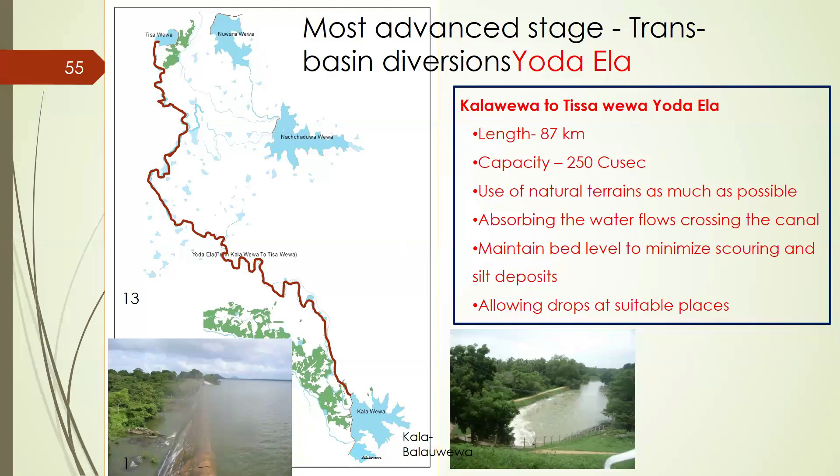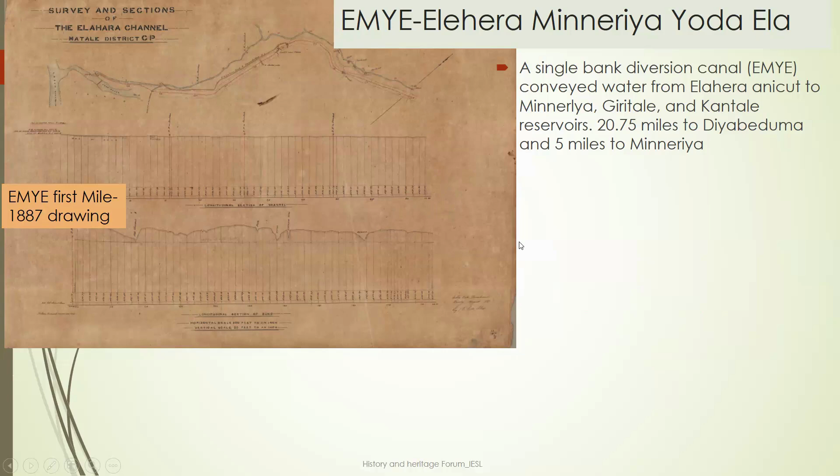I'm not going into the details, though I have shown the EMYE first mile drawing here to give you the details, but I think time has already passed—more than what was allowed. Anyway, I will come back to it if someone is interested.

My conclusion here is, when we go deep into the Sri Lankan ancient irrigation system, we realize it is not just feats of engineering.

There were masterful solutions to water management challenges, and that remains relevant even today. Most of the design principles and planning principles are still valid today. So let us draw inspiration from this ingenuity of our ancestors, and create engineering solutions to stand the test of time, just as they have done.

My opinion is that we have not yet harnessed the full potential of our system in view of earning foreign exchange. That is the most pressing issue we are facing at this moment. So this is the land most suitable, Sri Lanka, to promote hydraulic heritage tourism and irrigation heritage tourism.

With that note, I want to conclude my presentation here. Suran, I am not sure whether I have exceeded the time given to me. Thank you very much for your attention.

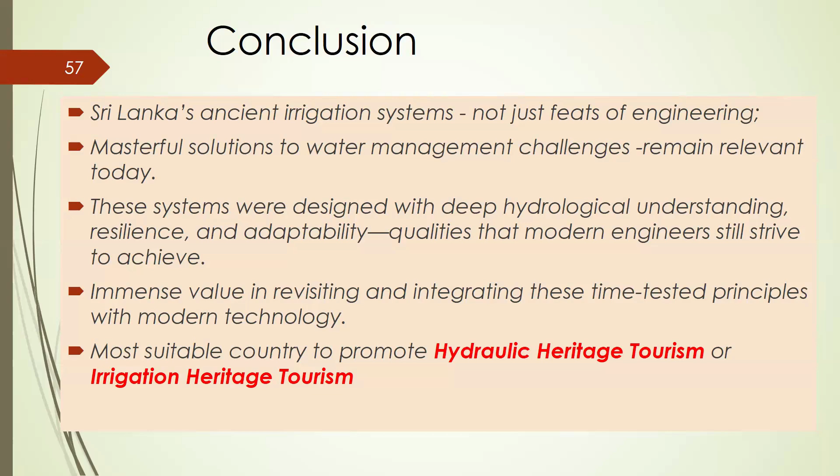We could see only the tiny part, I must say, of the ancient engineering. So we have to see the major part, it is like an iceberg, but you can see only a tiny part. We have to see the larger part underneath. Let us explore that unique heritage in a more scientific manner and show it to the world. With that, I would like to conclude. Thank you so very much for your patience and attention.